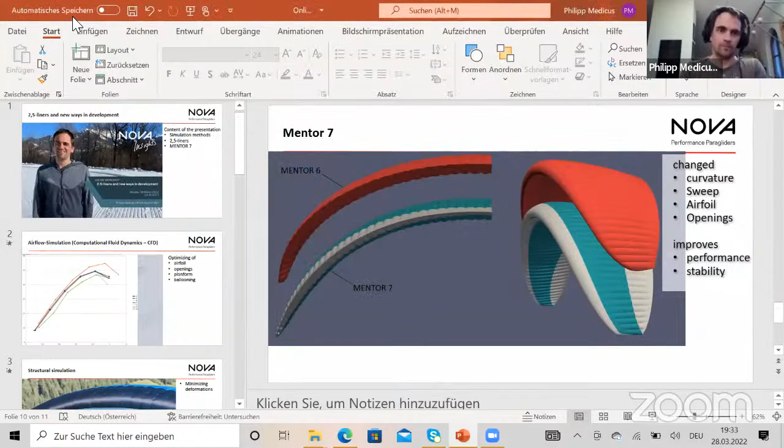I think I'll switch to sharing my screen, if that's okay with you, Till. Yeah, go ahead. I'm struggling to find... not struggling anymore. Sorry. Still, we don't only see your face, which is not too bad, but now it looks better. But it's improvable. Yeah. Sorry. Can you go on full screen presentation? Yes. Sorry to everybody if there's some inconvenience.

Okay, here we go, finally. Your turn, people, finally. So I would like to talk with you about 3 topics mainly. That's simulation methods in paragliding design, an area where we made a lot of progress during the last 1, 2, 3 years. I want to talk to you about 2.5-liners in general, and specifically about the Mentor 7, which is a 2.5-liner, or the Mentor 7 Lite, which we decided to launch as the first wing.

So I'm going to start with simulations. There are two big aspects of simulation. The one aspect is the airflow simulation, or computational fluid dynamics, also called CFD for short. That's basically a virtual wind tunnel, and in this virtual wind tunnel you can put whatever object you want. The object we want to put in are obviously paragliders. And this virtual wind tunnel then gives us the aerodynamic forces which act on the paraglider. That's what we are most interested in.

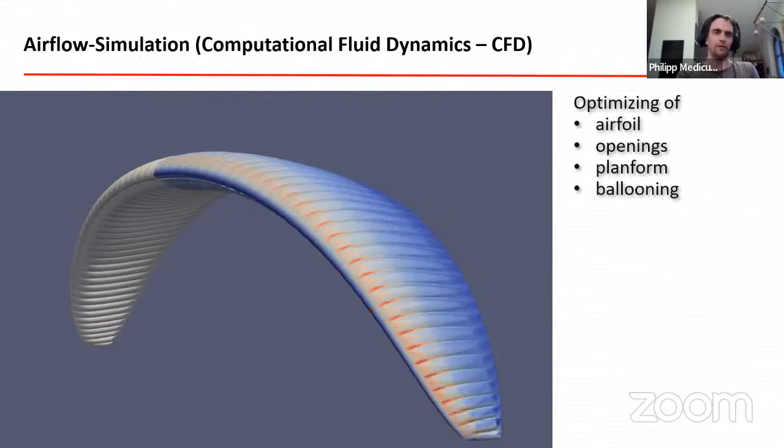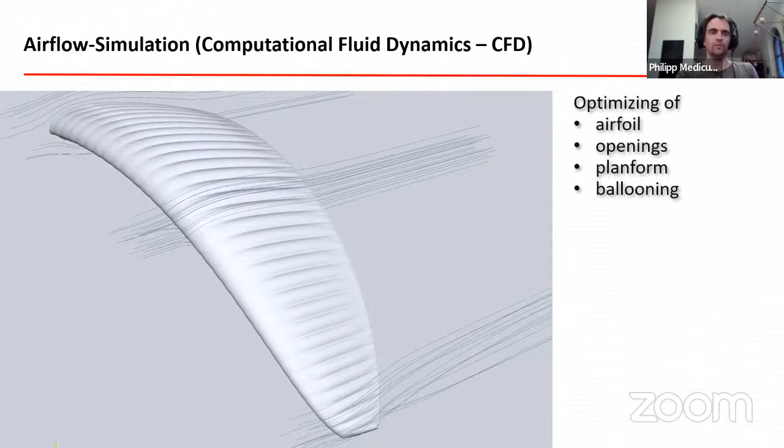So that's a screenshot of such a simulation where you see the pressure forces acting on the paraglider. Blue is the area of low pressure, red is the area of high pressure. There are many different visualization methods. You can also see what's called a virtual wool thread, which gives you a very good idea of how the air is actually passing above and below the wing. You can have close-up looks here at the wingtip. I hope this vortex movement is visible, which is created by the air passing from the high pressure bottom sail to the lower pressure top sail.

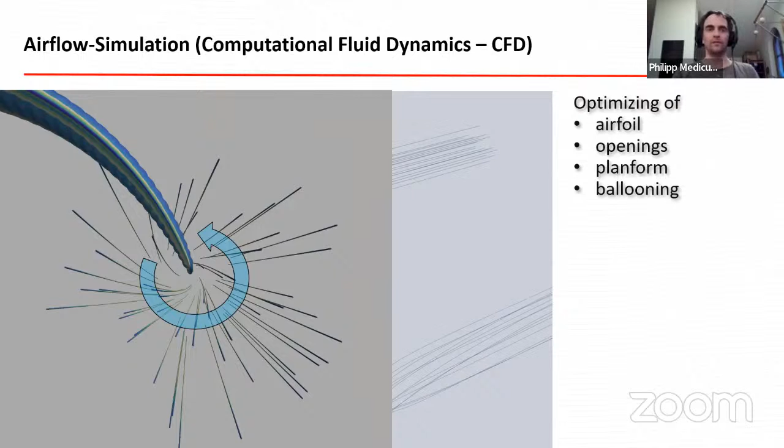We use this airflow simulation to optimize the airfoil, to optimize the openings. We can also see with the CFD simulation the internal pressure, which is obviously affected by the shape of the openings. We optimize the shape, the planform of the wing, and we also optimize the ballooning. The CFD simulations are not so much in the day-to-day work about colorful pictures, but more about hard numbers, which I then use to compare different wings and create polar curves, which might look like this, showing the lift created by different airfoils. Before building a first prototype, I often compare polar curves of 100 different wings.

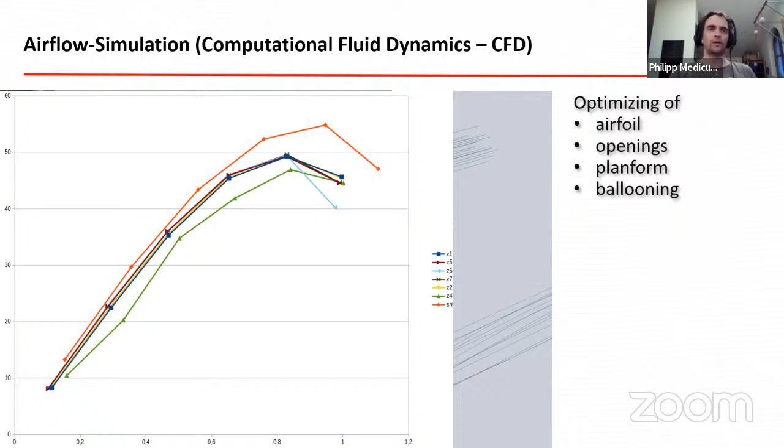The second aspect of the simulation is the structural simulation. This is necessary because the object we put in that virtual wind tunnel is a rigid object, and we all know the paraglider is as non-rigid as aircraft can get. This structural simulation knows that the wing is made out of cloth, which deforms in several ways. What you see here is a simulation of a Mentor 7 prototype at full speed.

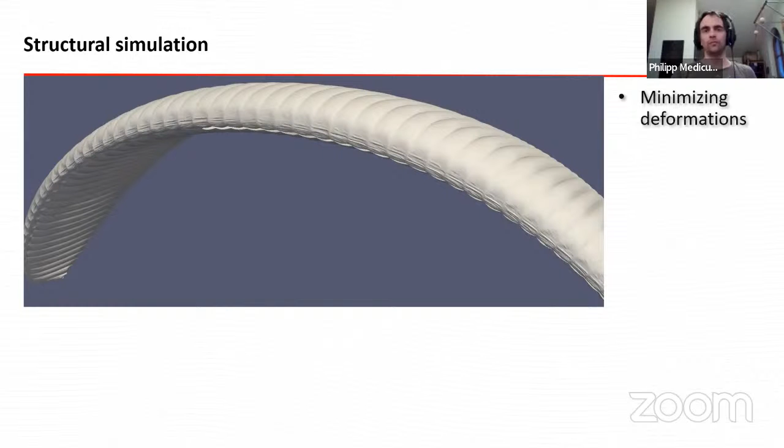On the bottom you see the very same prototype flying at full speed, and the wing is pretty fast. So the pressure at the stagnation point gets pretty high and creates some wrinkles. In this case, the goal is to minimize deformations and minimize wrinkles. This structural simulation is a very important tool to play on the computer with different concepts to minimize the wrinkles.

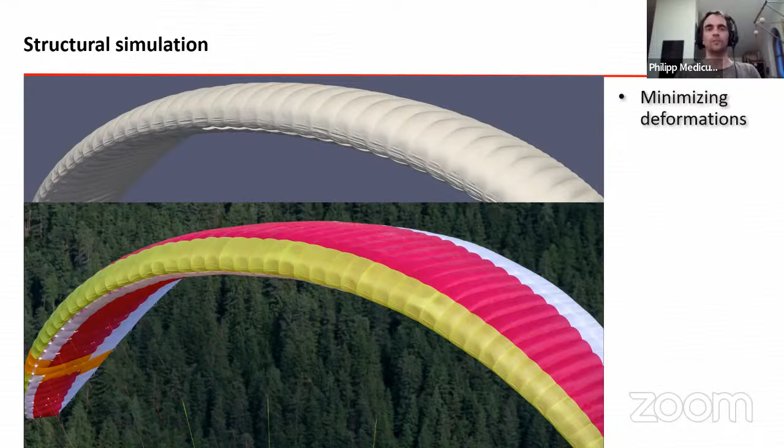Here you see the leading edge shape of Mentor 7. This is at trim speed, so the comparison is quite a bit of a cheat, but still this very clean shape we see here is the result of many, many simulations and many iterations. And it's not just trial and error, but by trying and failing in the simulations,

you get a deeper understanding of how the different aspects of wing design interact than you could ever get by building prototypes, because the number of prototypes you can build is obviously limited. Even worse, the cycle time for building a prototype, taking photos, and then building another one is like one month, whereas the simulation time is one hour. So you can learn a lot faster, and you have a lot more data to learn with this simulation possibility than you would have without it.

There's just a quick question. Yes, quick question from my side.

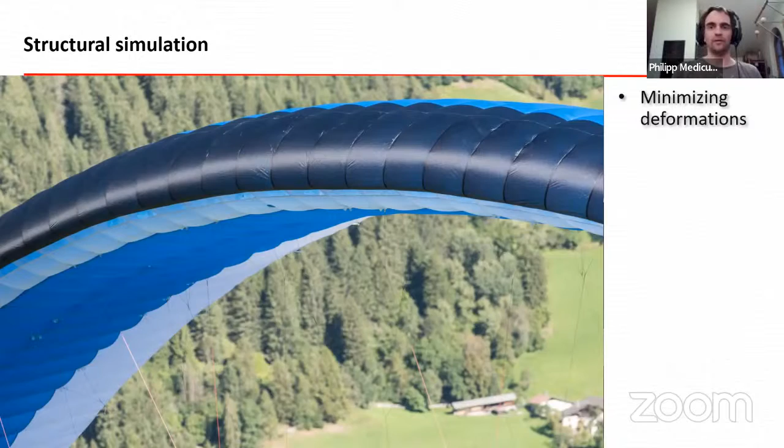So about the structural simulations, there are obviously not only unwanted deformations on a paraglider, but also wanted deformations. An obvious example is applying brakes. So that's a tandem prototype where you see gradually pulling more brakes.

In this simulation, we can actually measure the brake pressure. We can measure the lift which is created, so we can predict pretty well how the flare of a wing is going to be. Because a wing that flares well is supposed to increase its lift a lot when you pull the brakes. That would be my technical translation of a good flare.

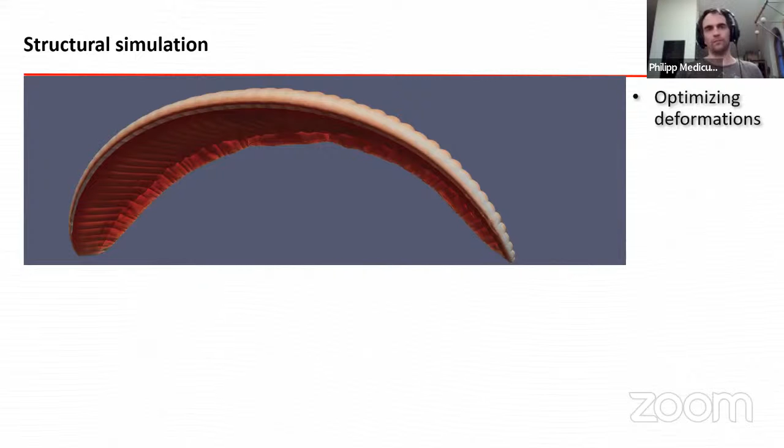Furthermore, you might want to not need too much brake travel, and you might not want to have too much brake pressure. All those aspects can be simulated very precisely with the tools we use. And we can obviously also judge the performance on brakes, which on an XC wing is important for the climb performance. It's not the most important aspect of climb performance, but it's one important aspect of it.

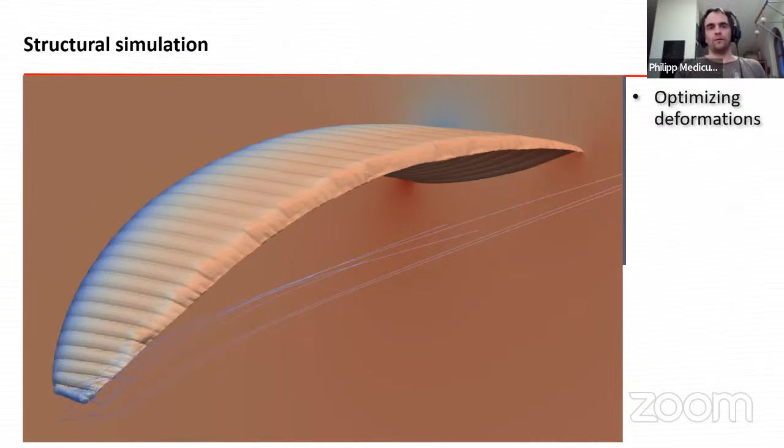Here is another simulation to real life example, something which probably most of you know. This wrinkle which you see here is visible to a certain extent on most paragliders, 3-liners and 2-liners. I will try to explain what causes this wrinkle.

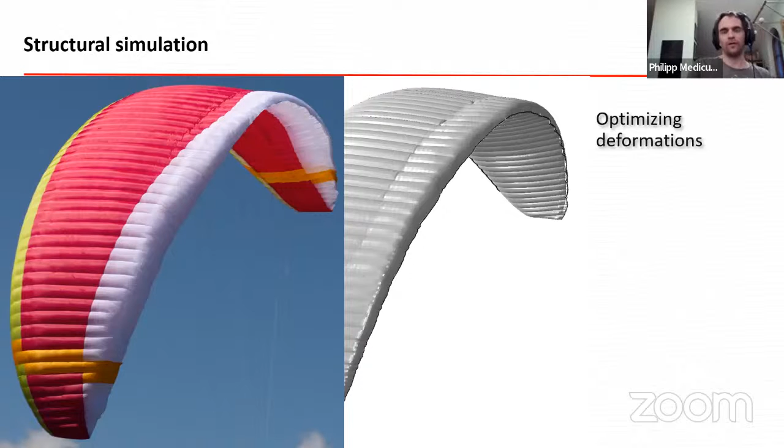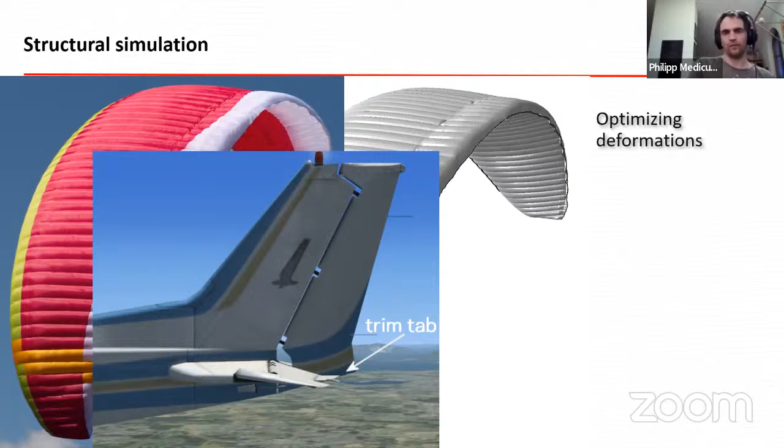Many airplanes have this small trim tab, marked by this arrow, which is way smaller than the actual rudder. Here's a sketch of this trim tab. On the very rear, you see the trim tab, which is moved downwards, and thereby it creates lift. This lift then moves the actual rudder upwards. That's the function of a trim tab, visible on many airplanes.

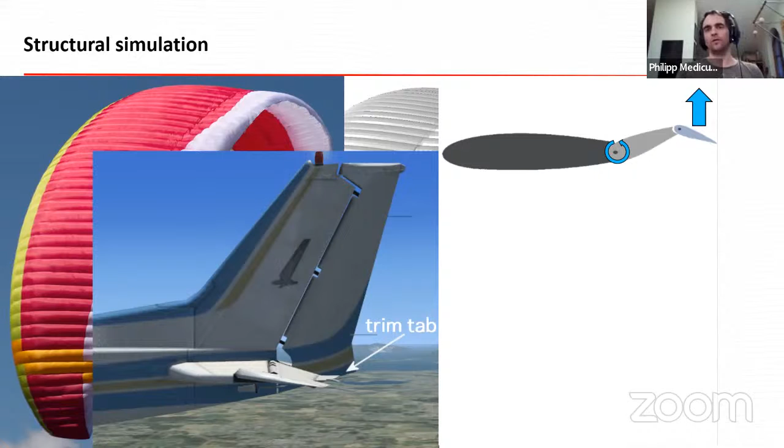What is happening on the paraglider is quite the same, I would say. You pull the brake downwards, which creates lift. This joint, which is here on the airplane, is the C attachment. So the wrinkle you see here, usually above the C attachment, or on the 2-liner above the B attachment, is the joint which is the rudder of an airplane.

We can also simulate those kind of deformations, and judge if it's harmful or not, if it's just an aesthetical problem, or if it decreases performance, increases brake pressure, whatever. We can also measure how the brake pressure progresses, which is quite important for the feeling you get on a glider. You want the brake pressure to smoothly progress. If you have too much of such deformations, you might have a sluggish feeling, which we can to some extent predict in the simulation.

So all these are great tools, and a great help to improve the wing, but there are still real life setbacks. Otherwise, it might be boring.

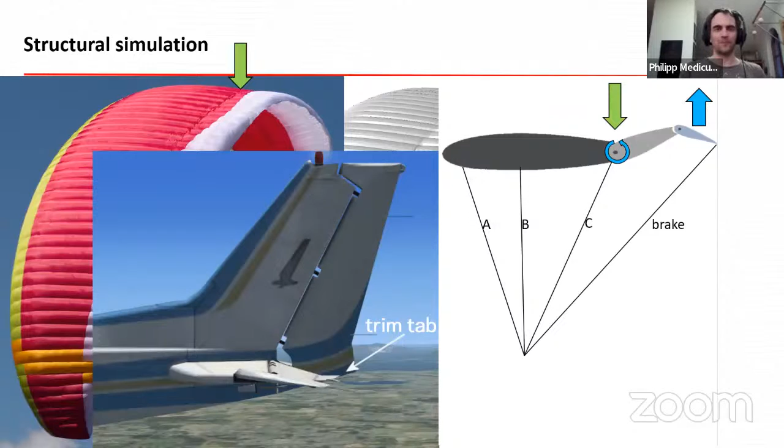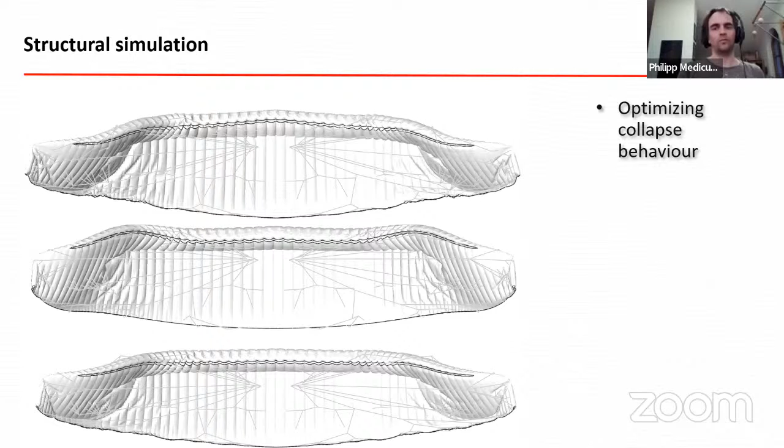I tried very small trim changes to affect the collapse behavior. Again, you see that the GoPro screenshot is not the very best quality, but you see that the behavior of the wing is similar.

We can also simulate collapses and also full speed stability to a certain extent. So we can, for example, accelerate the wing until it collapses. That's a surprise we are not dealing with anymore, that we build wings that would collapse at half speed, because we improve those concepts on the computer before building them.

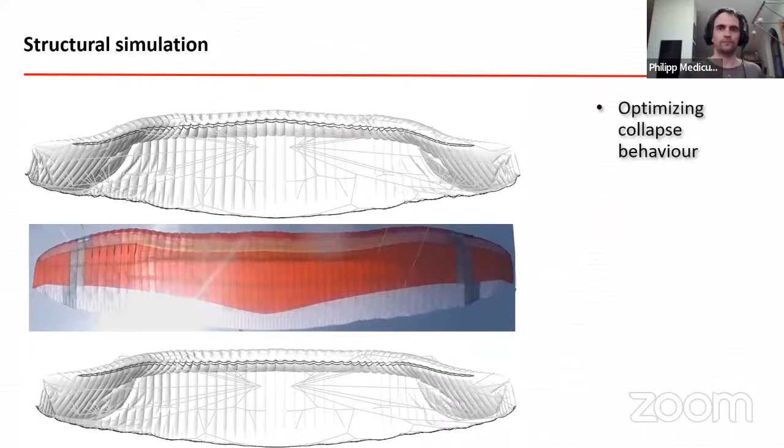So the second topic of my presentation is the 2.5-liner. What makes a 2.5-liner a 2.5-liner is very simple: the C3 line is missing. So you see here at the wingtips, there is just the A and B main lines, and there is no C3 main line. That's the main property of the 2.5-liner.

You see here, on the Mentor 7 again, especially in the 2-liner sections, the nylon rods which we are using, which improve the stability a lot and which are necessary for nice flying behavior, the same way as they are necessary on actual 2-liners.

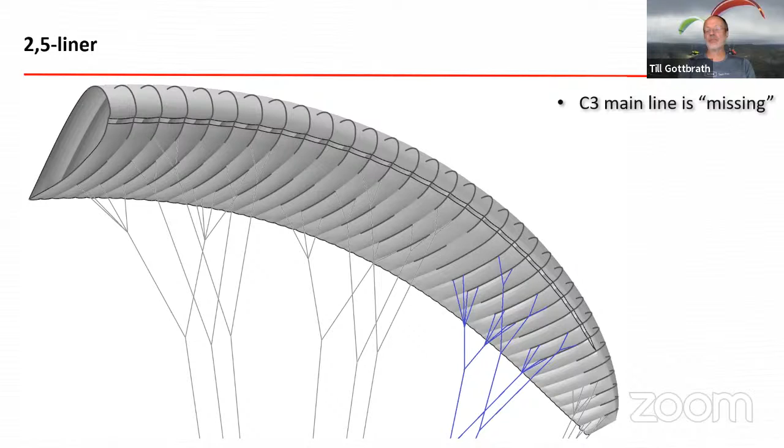But these lines mean that the rods mean it's not possible anymore, this easy packing concept that NOVA used to have. Is that right? Yes, it's not meant to be violently stuffed into a sack, into a packing bag. The rods need a bit more care when packing the glider. That's something you need to take care of, like with any wing with that amount of rods.

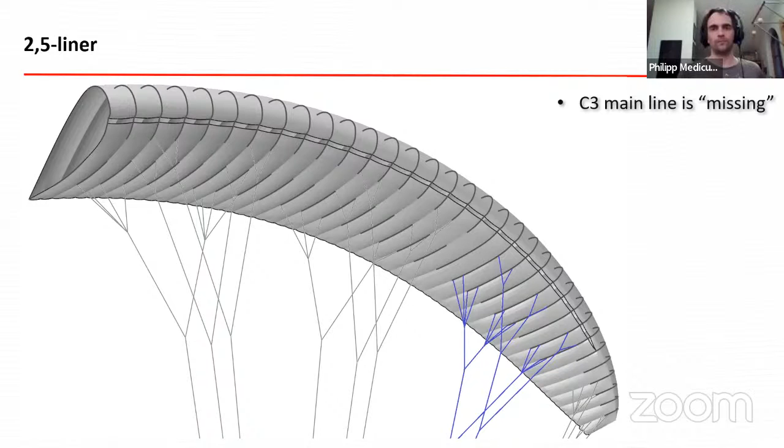The advantages of this concept are obviously less line drag, although the difference is not very big on a 2.5-liner. Here we have 9 main lines, including the stabilo main line. If we had a C3, it would be 10 main lines, so around 10% drag. Actually, it's even less than 10% drag saved because we have no brake here. So the reduced line drag is beneficial, although it's not a very big benefit because the effect is quite small.

A more important effect is the improved wing twist along the whole polar curve. On the screen you see a wing at trim speed. The wing at top speed does something like this. It's quite important that this transition happens close to the aerodynamically optimum way, meaning there is an ideal wing twist for trim speed and an ideal wing twist for top speed. By wing twist, I mean how the angle of attack changes along the wingspan. It's quite difficult to move all those lines with a riser being close to that optimum.

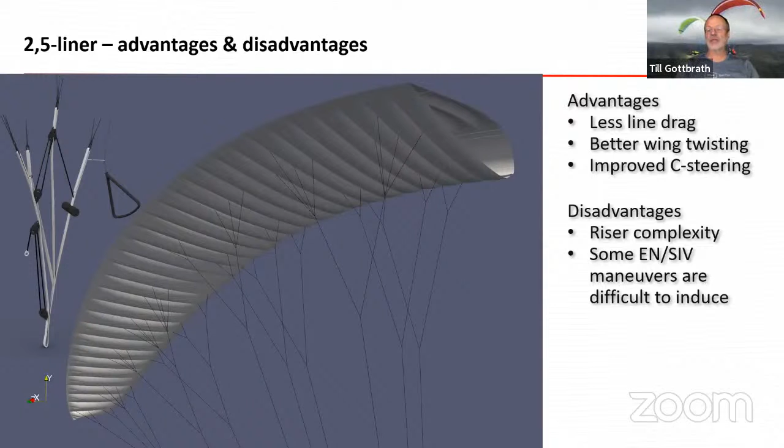But generally speaking, a higher aspect ratio is more prone to cravats. I think aspect ratio is maybe the most important measurable aspect which affects the likeliness of cravats. Furthermore, the line layout impacts the likeliness as well, but not the 2.5 versus 3-line layout. And the aspect ratio, 5.5, is quite low for a high B wing, so the cravat risk is quite low as well, and certainly not affected by the 2.5-liner setup in one way or another.

So I talked about the advantages of the 2.5-liner setup. The disadvantages in case of the Mentor 7 is the riser complexity. The C handle, for example, is very beneficial in flight, and no one who used it could imagine missing it, but it's a handle which a line could be tangled around at launch, so it needs a bit more attention at launch. The riser is a bit longer than it's supposed to be. So the riser overall needs a bit more attention than a conventional riser would need, but it's nothing crazy.

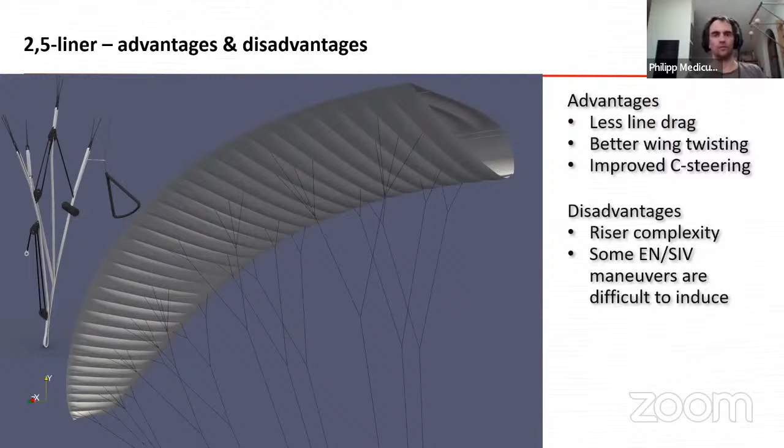So those were my general statements about 2.5-liners, and I will finish my presentation with a bit more specific statements about the Mentor 7. The 2.5-liner setup of the Mentor 7 is certainly one important and big difference to the Mentor 6, but it's not the only one. It's certainly the most marketable difference, and it's an important one, but we have also changed the shape of the wing completely.

So you see here a comparison of Mentor 6 and Mentor 7. The Mentor 6 has a lot more curvature with the wingtips being more curved and the center flatter. On the Mentor 7, it's the other way around: the tips are a lot flatter, and the center is slightly more curved.

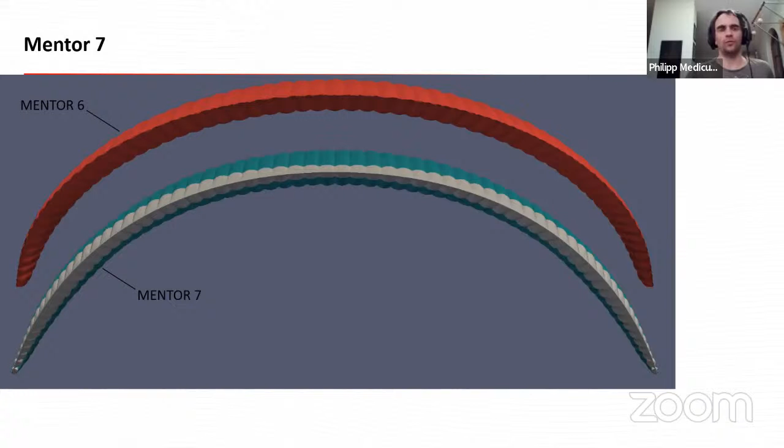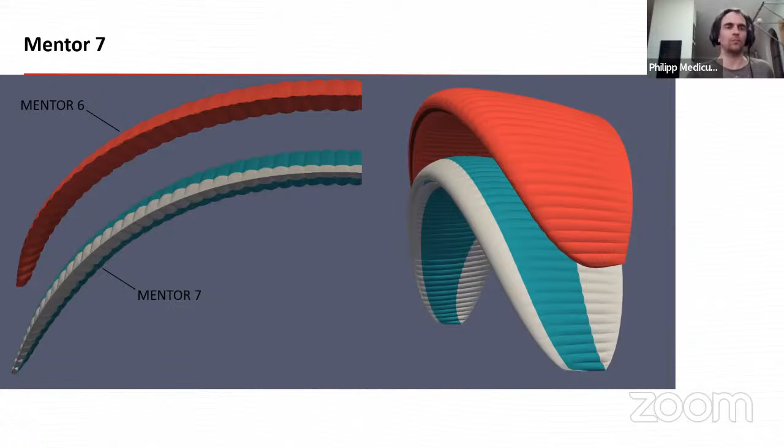That contributes to it, and also in the side view you see it's two completely different wings. These differences are a result of things we learned on the XENON, and also a result of new simulation methods which can predict performance and stability way better than ever before. That's why the shape and outline of the Mentor 7 looks somewhat untypical for high B wings.

The performance, the advantages of this changed curvature, the changed sweep - meaning how much the tips are moved back or forth - and the advantages of the airfoil and the openings, in the end it's about performance and stability. And those are both aspects where the Mentor 7 really shines: it's very performant, very fast, and very stable.

It's very fast at top speed, but actually quite slow at trim speed. So it's a really new wing. The difference between the Mentor 5 and the Mentor 6 is, I would say, a lot smaller than the difference between the Mentor 6 and the Mentor 7.

Is there also an advantage of having a lower trim speed? Yes, yes. A couple of advantages. One obvious advantage is the turning radius when thermaling - it's smaller. The slower you fly, the more narrow you can turn, the better you will climb, because you can fly closer to the thermal core. It will most likely also reduce your sink rate, which contributes to climbing performance.

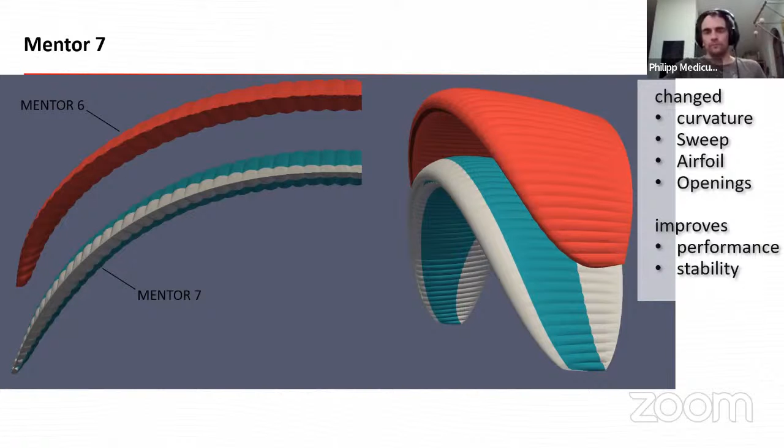Okay, I think you go on with the slides and answer some more questions later.

So the slide is a singular, it's a slide, it's just one slide left. And I wanted to summarize how the Mentor 7 actually flies.